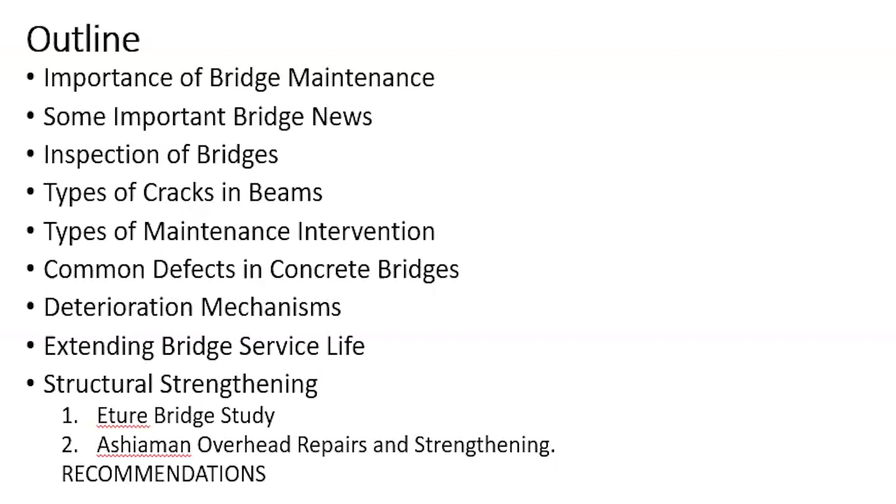On extending the bridge service life, we take structural strengthening as a case we worked on, the Ashaiman overhead repairs and strengthening. We attempted the same on the Eture bridge study, but in the course of the presentation, we shall see why Eture bridge could not receive the same approach as the Ashaiman overhead bridge had. At the end, we shall have recommendations for the Ghana Highway Authority on what steps to take.

Now on bridge maintenance: bridges are a critical component of the road and transport sector. Without a bridge, no matter how beautiful roads are constructed, if there is an obstruction and no link, there is no way the road will function. It's the bridge that links the two roads when there is any obstruction. So it is essential to have regular bridge maintenance for more economic and safe use of road infrastructure. If bridges are not well maintained, cases like the examples we will give will happen, and the economic life of a community or society will be affected.

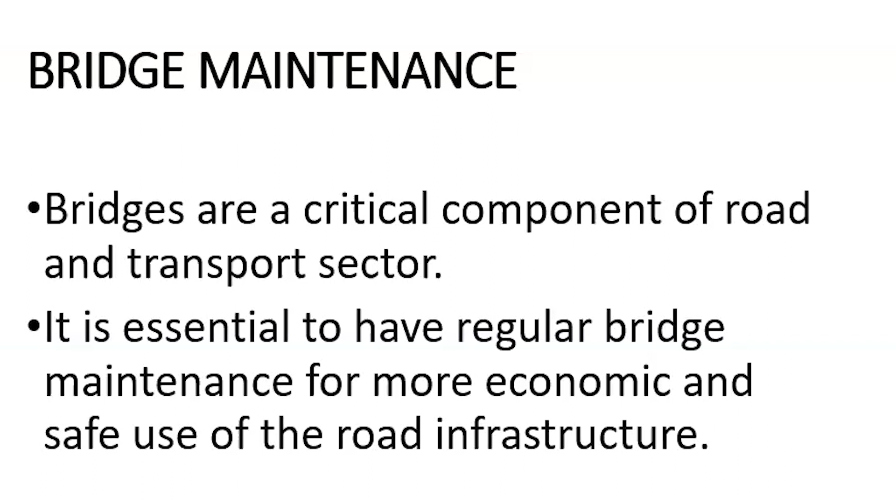We want to mention a few issues that have happened to bridges across the world, outside the country. Recently in the news, the Baltimore bridge collapse happened in the United States of America on 26th of March 2024. It's a very long span, 2.6 kilometer bridge, a steel arch-shaped continuous truss bridge, where there was a collapse when a ship called the Dali struck one of its piers. A pier is one of the substructures of the bridge, which plays a very vital role. When such substructures are affected, no matter how huge or big, a single substructure can cause the collapse of an entire bridge.

That was what happened when the ship was supposed to pass under the bridge, missed the track, and hit one of the piers, causing the entire collapse. This has caused so much damage to the United States of America. The Baltimore port in particular has been blocked; shipping to and from the port became impossible. As a result, 8,000 jobs were lost from just this accident. The economic impact of this closure of the waterways costs $15 million per day for the state. That is how serious just one accident on a bridge has caused the country.

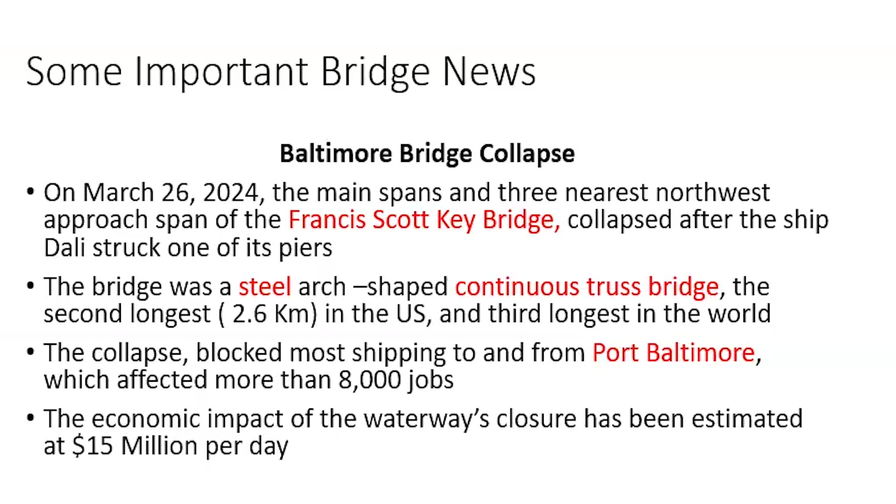Another example of a bridge collapse is the Morbi Bridge in Gujarat, India. This also happened about two years ago. The bridge, which had been constructed and was supposed to have been rehabilitated, had gone through some repairs. Four days after reopening, the bridge collapsed. Even though they had come to do the rehabilitation and repairs on the bridge, just four days later it collapsed. The consequence of this accident was that 140 people died and dozens of others were injured as a result of the collapse. Just one bridge collapse, and instantly 140 people died.

There has been an investigation into this. The report from the investigation team talks on two things: administrative lapses and technical incompetence, meaning due process was not taken to get the right candidate for the job. They were given the job despite being technically incompetent, and this caused very big flaws in the whole work. Such things happen because importance has not been given, or some interests have come in, where people have lost lives, and the government also has so much to pay for this particular thing.

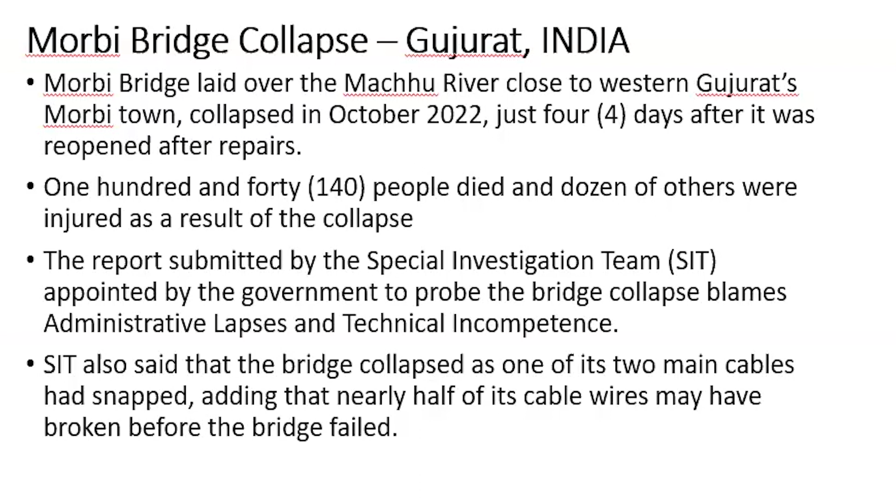When a cable is lost, it means we have lost some of the supports. So 1 of the 2 main cables snapped, and half of each cable's wires might have broken before the bridge even failed. This was some of the technical findings after the accident. It's observed that of 49 wires of the cable, 22 were corroded, indicating those wires may have already broken before the accident. The remaining 27 wires broke recently.

This tells us that there has not been proper inventory taken, proper work done during project preparation. Some things should have been seen, that these things had to be replaced completely, and that was not properly done because of technical incompetence.

Additionally, the vertical suspenders that supported the bridge were incorrectly repaired. We have the cables and the superstructure deck, and the link between them is the suspenders. These suspenders were supposed to be repaired, but they were not properly repaired. Old suspenders were seen to have been welded with new suspenders, so this will not work.

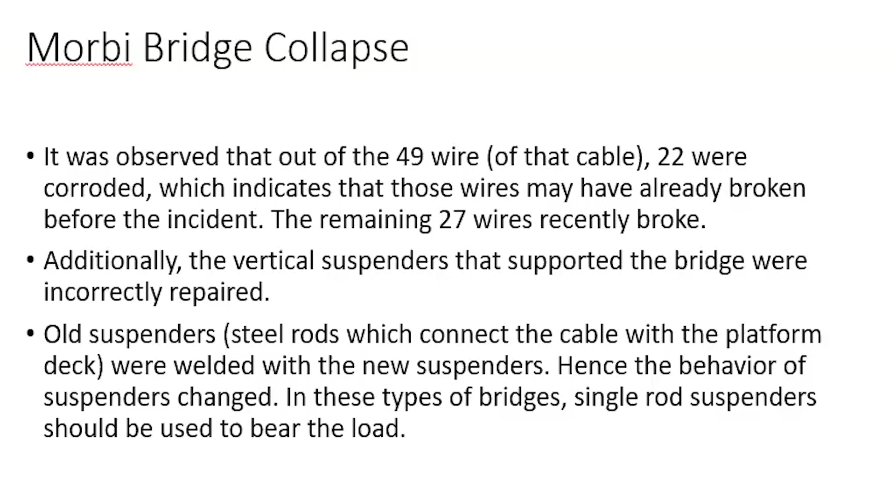The steel rods which connected the cable with the platform deck were 2 things. We're supposed to have 1 single suspender per cable and deck, but 2 suspenders were welded, which has been a very serious technical flaw in the entire works.

These are the consequences of not taking bridge maintenance very seriously or paying much attention to it. Now, inspection of bridges is the first stage of the work of bridge engineers. We first have to go and inspect bridges, and when doing so, there are things we consider.

You come there first, you check the top of the bridge. You look at everything that has to do with the approach of the bridge, the furniture — all these things will be looked at. Every single thing will be considered.

One important thing in this inspection is that when you look at the top, we have to look at an important aspect of the bridge furniture, which is the drainage. The bridge drainage is very vital. When there is blockage in the drainage, whatever comes from the bridge deck has to be immediately drained out. If there is blockage, this will give us a problem.

So we check the top, every aspect will be checked before we go underside of the bridge. We look at the beams and the slab, the piers, the abutments, and the bearings. These are all important things that, in this first routine visual inspection, we check. The critical aspect of this inspection for the concrete elements of the bridge is to observe cracks.

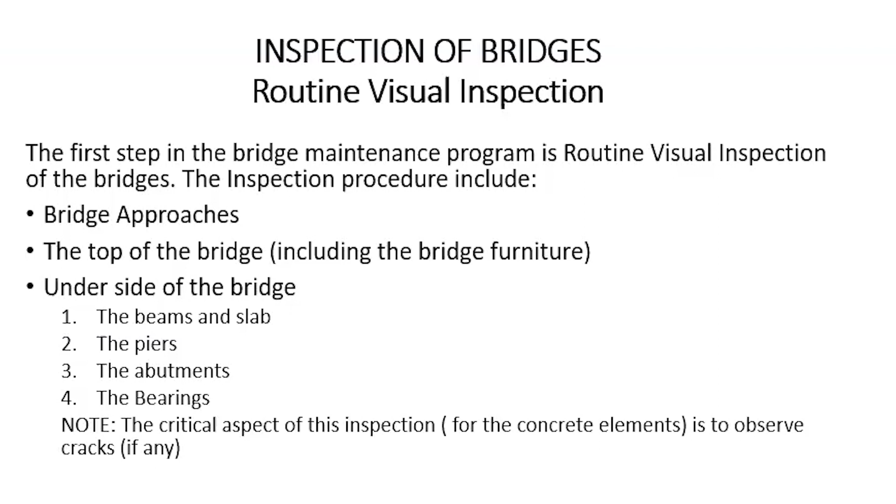Cracks are very important things we consider when inspecting our bridges. So when we go for this inspection, after we get the first information from the visual inspection, it will be marked and recorded. Based on the extent of the deterioration, the engineer may recommend additional testing — maybe the information gathered isn't enough to know the actual remedial action to take.

There may be a further test, which we call a detailed condition survey. It's not every inspection that calls for a detailed condition survey. Some observations are obvious and don't need further study, but some need further investigation. This can also add cost to the particular bridge, because the detailed condition survey is more of a destructive one.

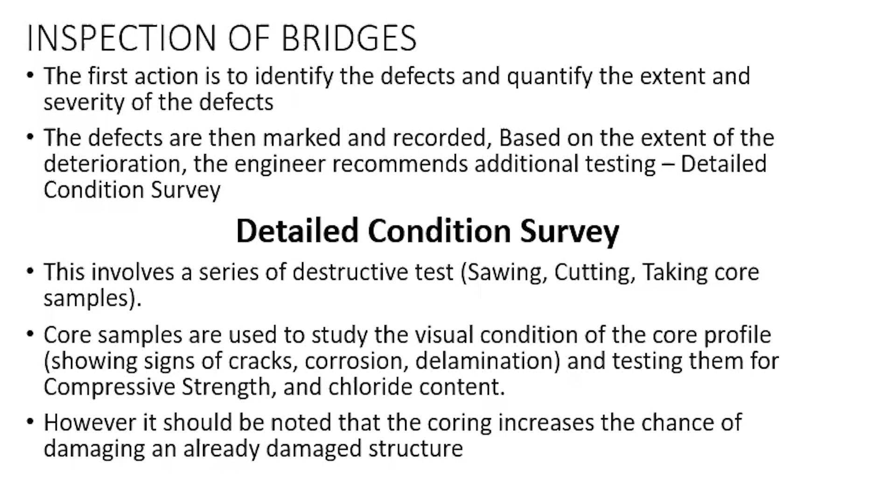It's a destructive test where parts of the bridge have to be taken off, either by sawing, cutting, or taking a core sample. So when the bridge is already in a poor state, such a survey can actually cause a collapse of the bridge. It's not always attractive to go into that, but when there's a need for it, it has to be taken care of.

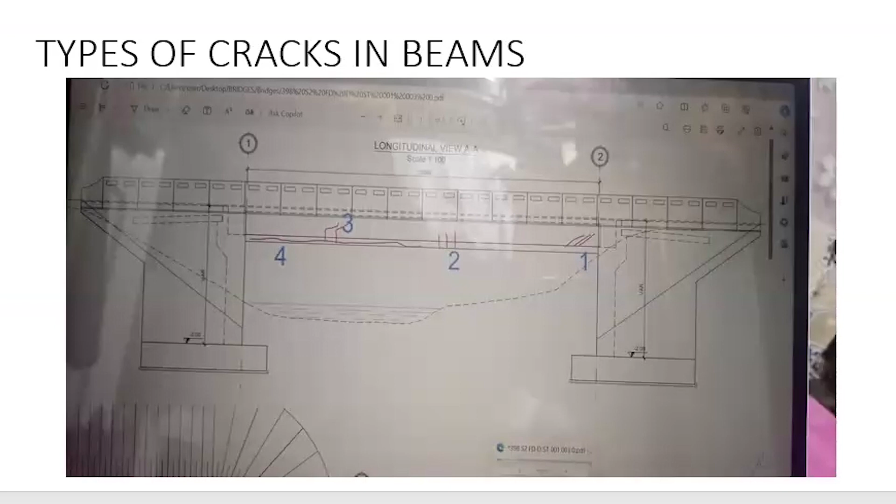The next topic is types of maintenance intervention. We have done the inspection and seen the situation on the ground. Now we have to plan what maintenance intervention to take. Bridges, depending on their status, require maintenance interventions such as routine, preventive, repairs, strengthening, and replacement.

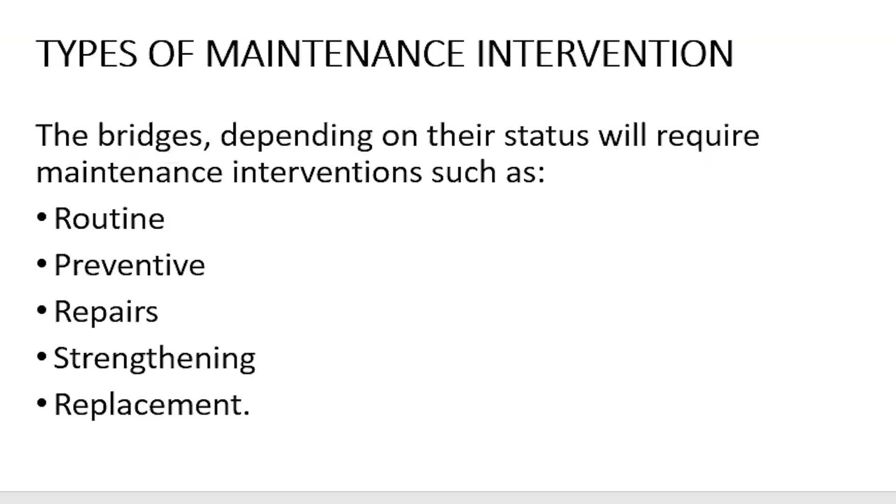Routine maintenance is very important - bridge engineers routinely visit the site, take inventory, and quickly remedy whatever is going wrong with the bridge, because this is less expensive and more convenient. But when neglected, it leads to very expensive interventions such as strengthening or replacement. Small things done regularly will keep the bridge serving for a longer time.

Like clearing vegetation in the channel and around the bridge is one of the activities done in routine maintenance, cleaning the entire bridge of debris, vegetation, and accumulated soil materials. Because when you clean the top of the bridge and there is rain, water will not be collected, and water is the biggest enemy of the bridge.

People will be surprised to hear that, but bridges are constructed in water. Why should water be the enemy? No, water is the number one enemy of the bridge. So whatever causes accumulation of water on the deck, around the beams, or in pockets of water is going to cause a very big problem for the bridge.

Also clearing the bridge drainage system, as I said earlier, avoids stagnation of water on the bridge deck. This is very important - replacing broken drain pipes and ensuring they extend 1.5 meters under the deck. When you take the cross section of a carriageway or bridge, at the two sides where we have a curb, we're supposed to have drain openings and drain pipes.

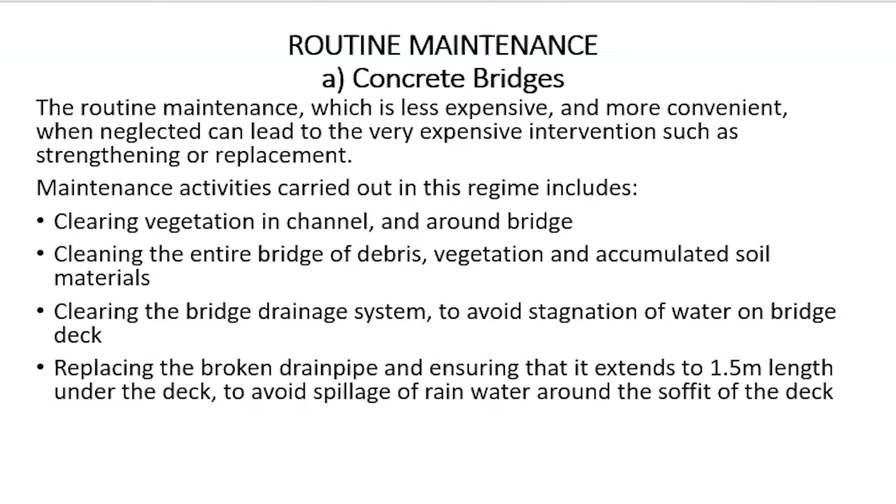And that drain, there should be a pipe that goes beyond the surface of the beam to about 1.5, so that water will not be spilling around, water will not be spreading around the beams when it is flowing the distance. So we have consequence of failure to carry out routine activities.

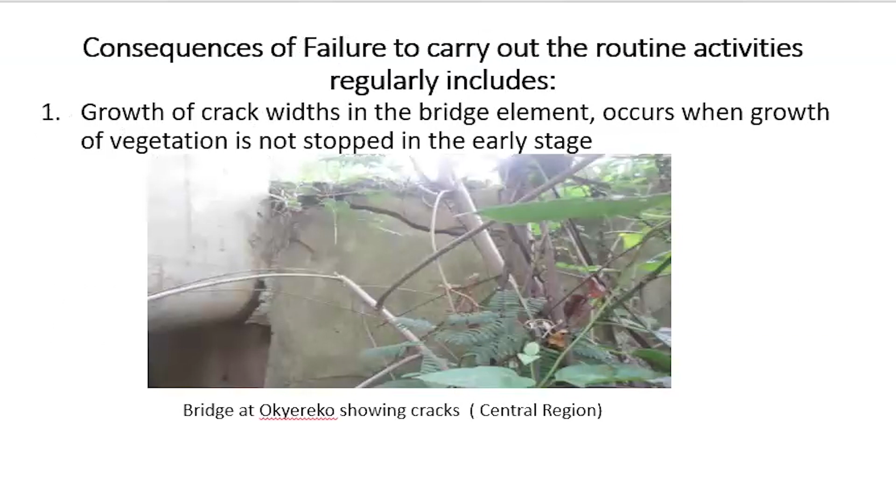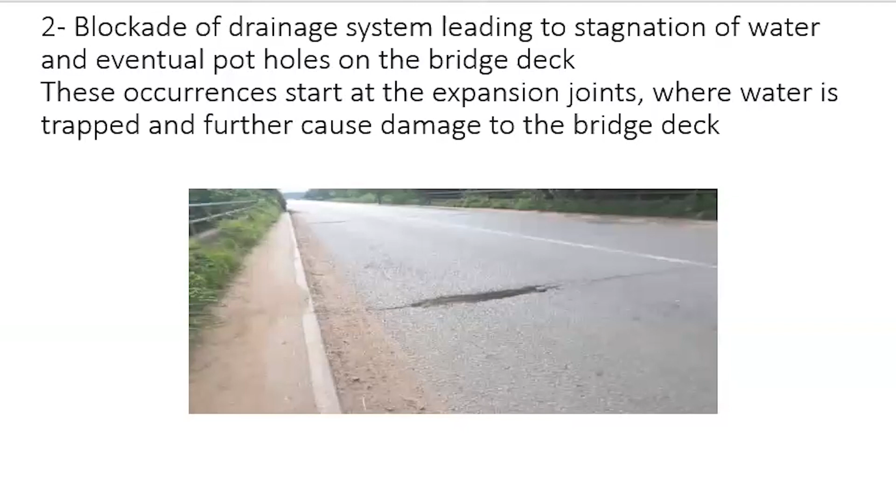You can see from the picture, this is one of the bridges we have in the country. As I approach, wing walls have cracks. We have a road like this. You can see the curb, the road, the walkway, and where the pipe or the opening for drainage is supposed to be, you can see that it's filled with soil, meaning the drainage doesn't function over there. So whatever comes there will be collected, and that will lead to damage to the bridge. When it's not repaired, this is what it leads to.

Now we come to bridge repair and maintenance. Because of the time limits, I think some of them we have to skip to go on to the main thing, but these ones are to guide us to understand what the main presentation is going to be. These are important for us to know when we are dealing with bridge repair and maintenance: lasting protection and durable repair of concrete components, high performance injection systems, structural rehabilitation systems, sealing of deck slabs, joint sealing, waterproofing of concrete. These things, maybe when it comes to costs and assets, we shall go into them. They are very important in our bridge maintenance and repair works.

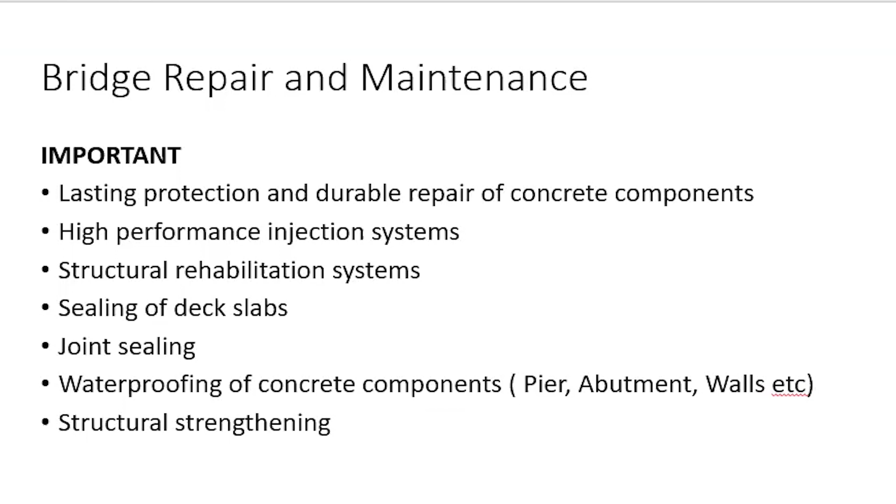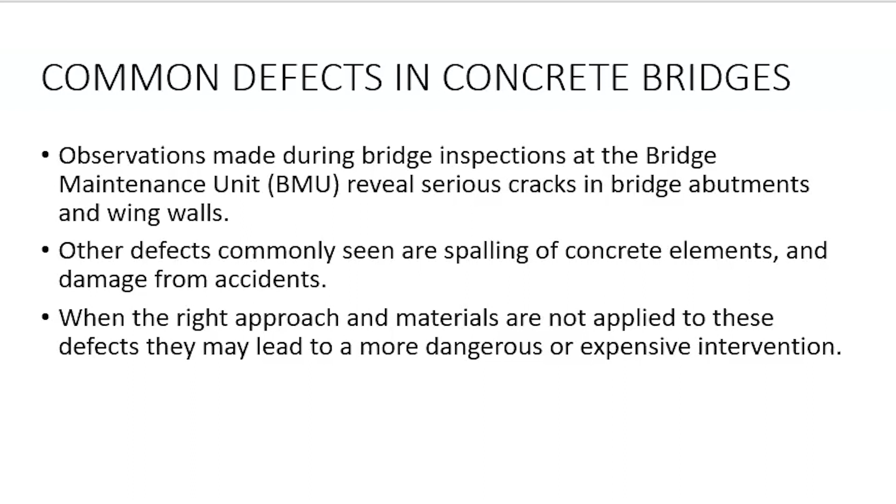Some of the common defects we see in concrete bridges, in BMU, we see that there are a lot of serious cracks in bridge abutments and wing walls. We see spalling of concrete elements, and also damage from accidents. When the right approach and materials are not applied to these defects, they may lead to a more dangerous or expensive intervention. Instead of just doing something small, when it's not done right, at the end of the day, we're going to replace entirely or do bridge strengthening, which is more expensive.

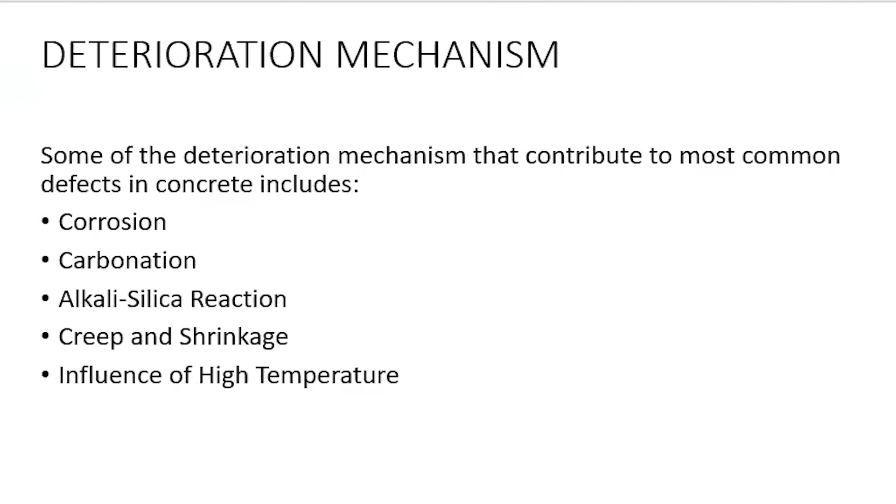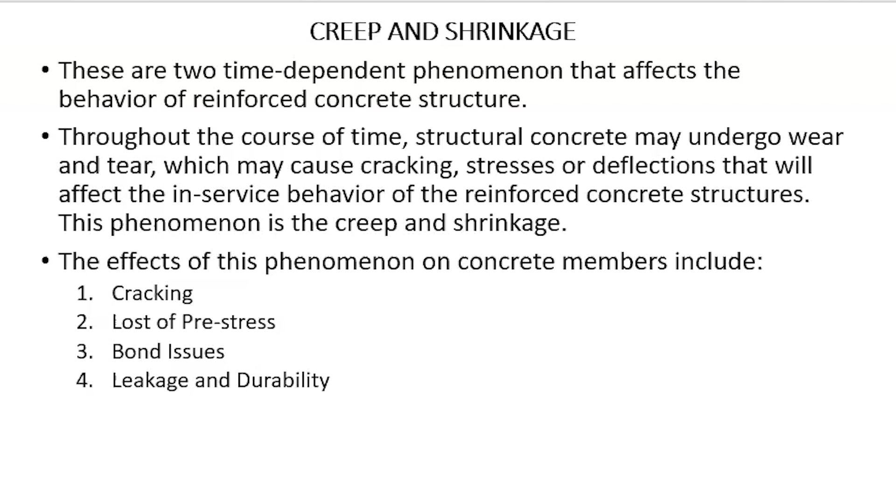Deterioration mechanisms are the processes that the bridge goes through, and they give us those defects. Corrosion is one of them, carbonation, alkali-silica reaction, creep and shrinkage, influence of temperature. These are 5 important mechanisms. So the effect of creep and shrinkage is what I'll mention here. It brings cracking, loss of pre-stress, bond issues, leakage, and durability problems. When there's creep and shrinkage in concrete, these are the effects. Maybe at a further opportunity, we'll talk about that.

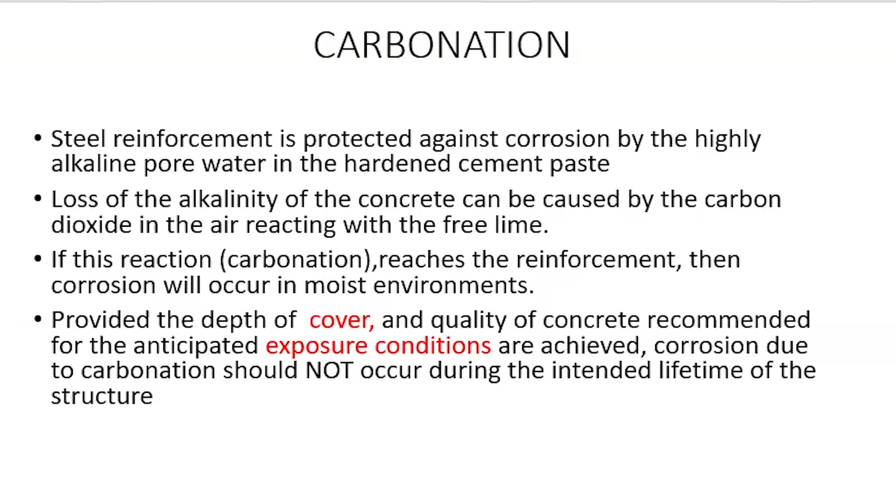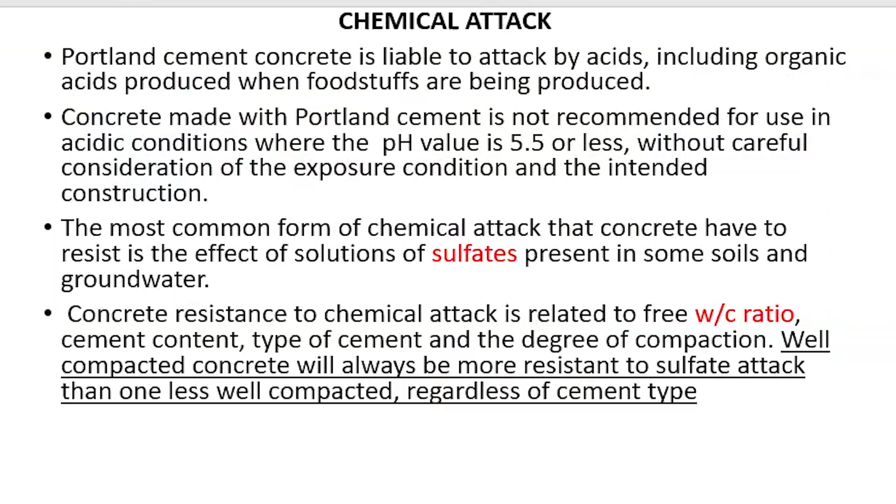Carbonation is a process that happens in the concrete when the concrete cover is not properly achieved, and when exposure conditions were not considered during construction. For every element in the bridge or structural component, there is exposure that should be anticipated, and that exposure tells the thickness of concrete cover we should have over the reinforcement. If those things are not followed, then we have such problems. This is one of the problems in carbonation. And chemical attacks like chloride attack, this is what it gives us.

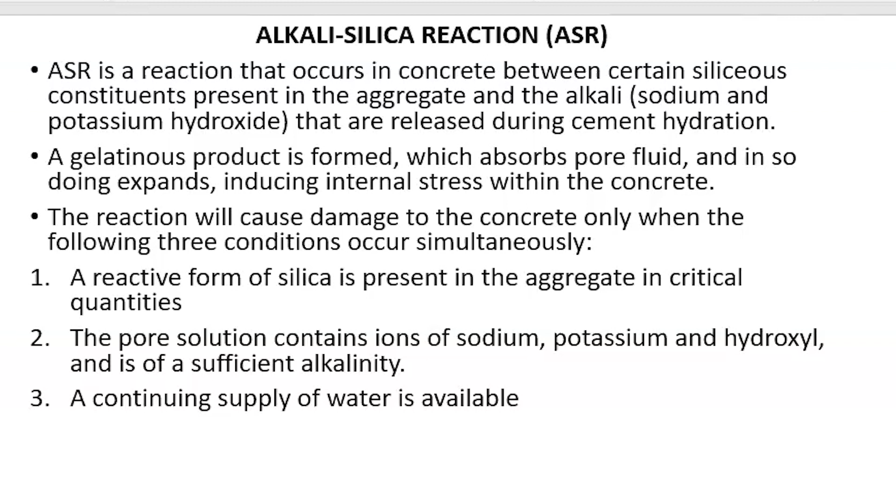Then alkali-silica reaction is also a very major aspect of bridges that will need an extensive discussion. It sometimes causes an expansive failure. Some are gradual, but after it is observed, there's nothing else that can be done, apart from, if it is observed earlier, making the structure completely watertight, which can halt its effect. So these are some of the effects that you can see with alkali reaction.

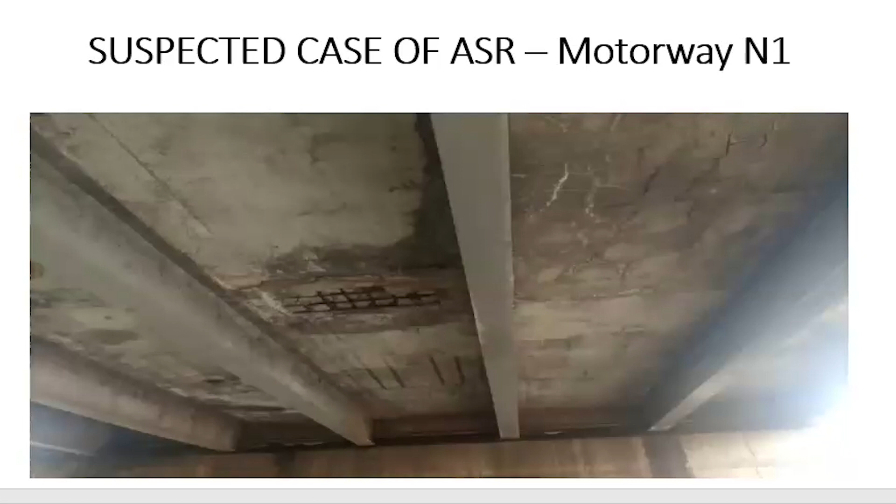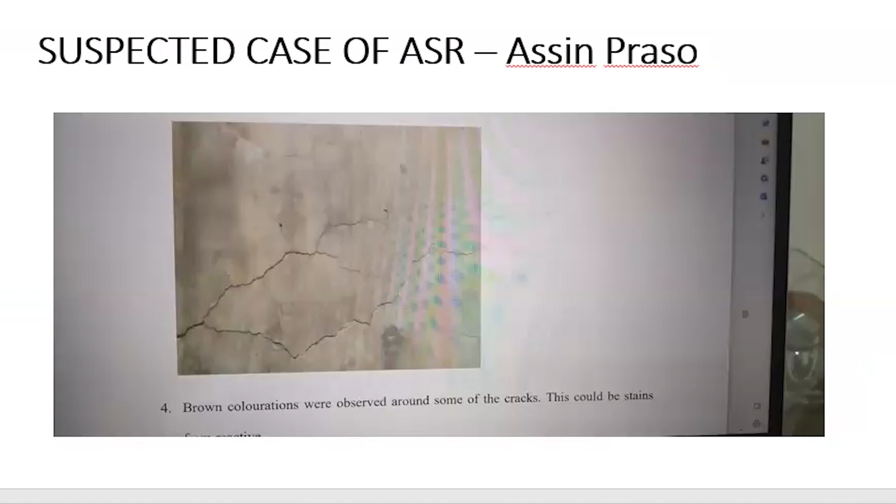This is typical of what we suspected on the motorway N1. This bridge showed very serious defects, and it was demolished and reconstructed. In highways, we call it Mahama Bridge. This was how it used to be when we saw these defects, but this is now a new bridge altogether. And Assin Praso is a case still under study because there's a suspected case of alkali-silica reaction on the substructure of the bridge. This is one of the pictures showing Assin Praso.

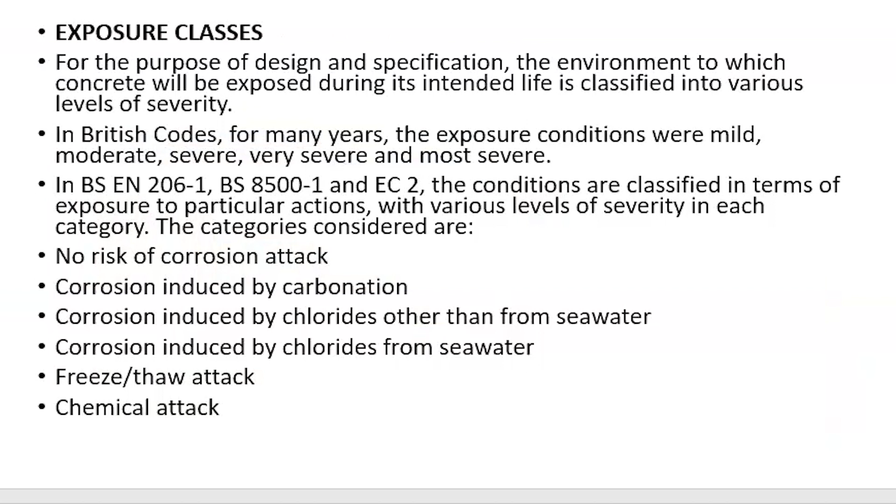Now, the exposure classes is what I talked about, and this is just the literature on that. Then, extending bridge life is very important. Extending the bridge life.

The observation on the concrete bridges within our road network is that many have lost their load-bearing strength due to deformation, corrosion, or damage to the original reinforcement steel. Others have been exposed to a load regime higher than what they have been designed for, as I said earlier.

So some of the problems our bridges are having are because the load regime has changed. They are now receiving higher loads than they have been designed for. Others are due to vehicular impact on bridge members, and those have reduced the

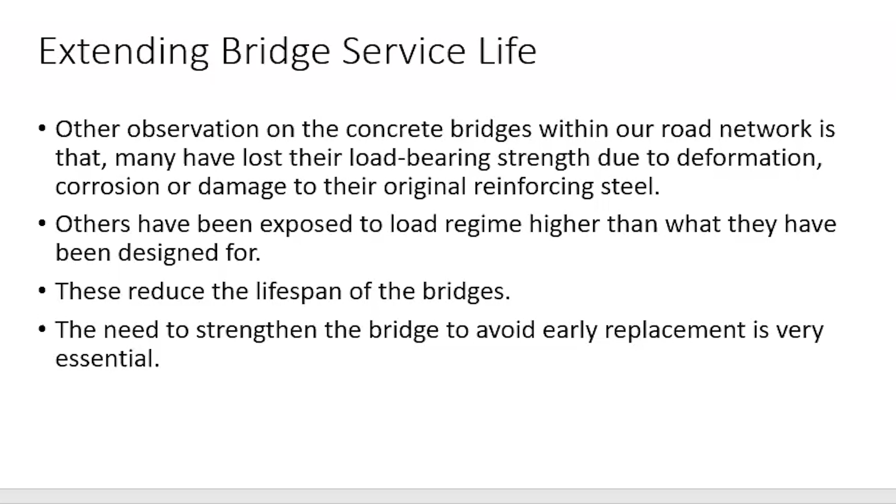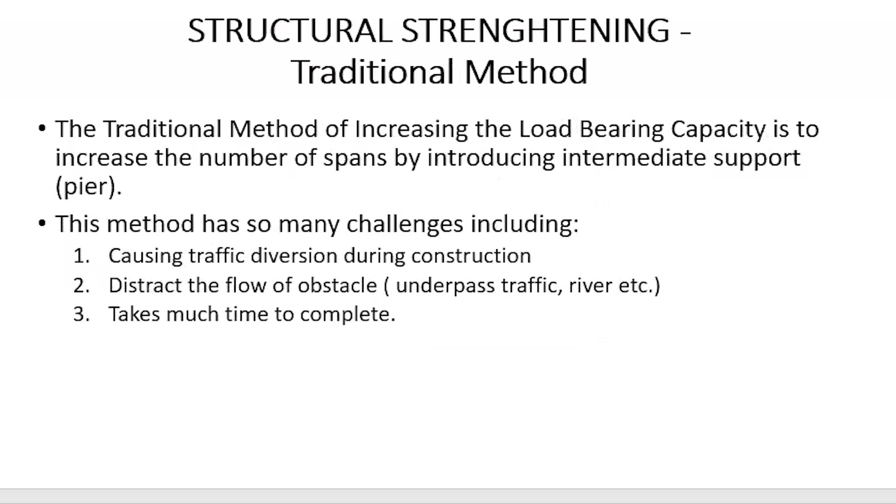load-bearing capacity. So on structural strengthening, we have the traditional method, which we used on the Iture Bridge when we saw the condition of the bridge. Iture Bridge, in the Central Region, is a typical bridge that requires strengthening and protection against aggressive environment. It is along the national route N1, within the haulage route.

This is a very important word. Haulage routes are the routes that always receive the heaviest loads, where abnormal loads are often applied. And this bridge is within that corridor. To increase its load carrying capacity, steel fabricated props have been provided to all the 3 spans. We gave them more fabricated props to reduce their spans.

And in July 2022, upon inspection of the bridge, the following very important observations were made. One span has the entire prop washed away, meaning one span is free. The support that was put in to strengthen it is no longer there. And the remaining 2 spans either have loose props or no contact with the props.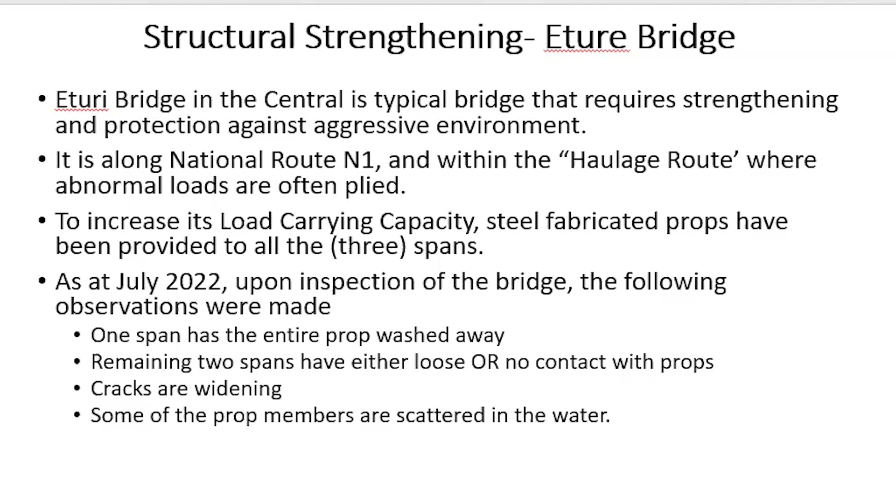The props are there, but the bearing we put between the prop and the underside of the slab has lost contact because of settlement of the props. The material under the props is being washed out by the tide that comes from the sea up and down. It washes and settles, so now there's a loose contact. And cracks are widened. Some of the prop members are scattered in the water.

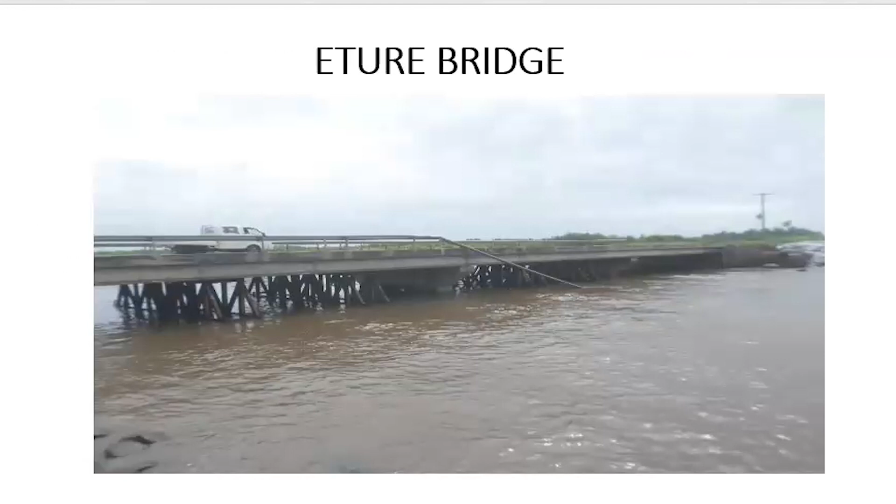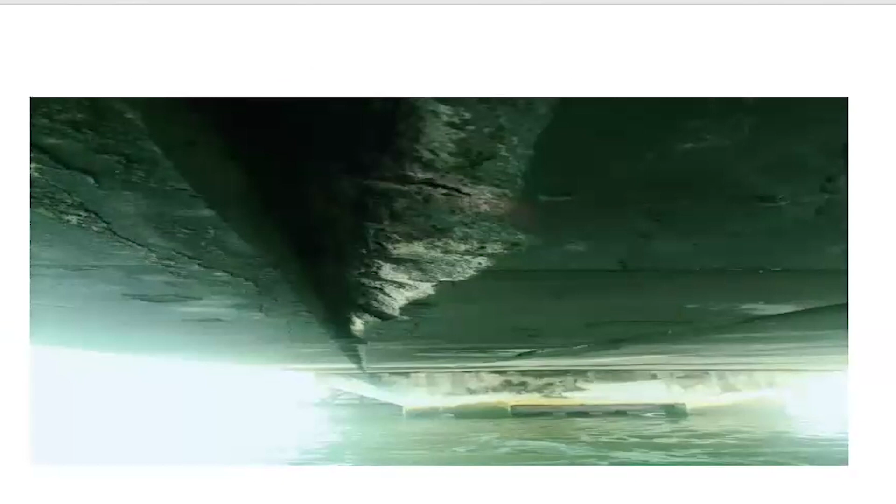As you can see on this Eture bridge, at the last end the props are not there at all. But the middle span and the first span still have some props. Here some of the spans show the underside of the bridge, which is serious. We can see a very possible chloride attack from the sea eating into the bridge, and cracks are widening. This is a bridge we always ply on the N1 at Eture, Central Region, near Elmina.

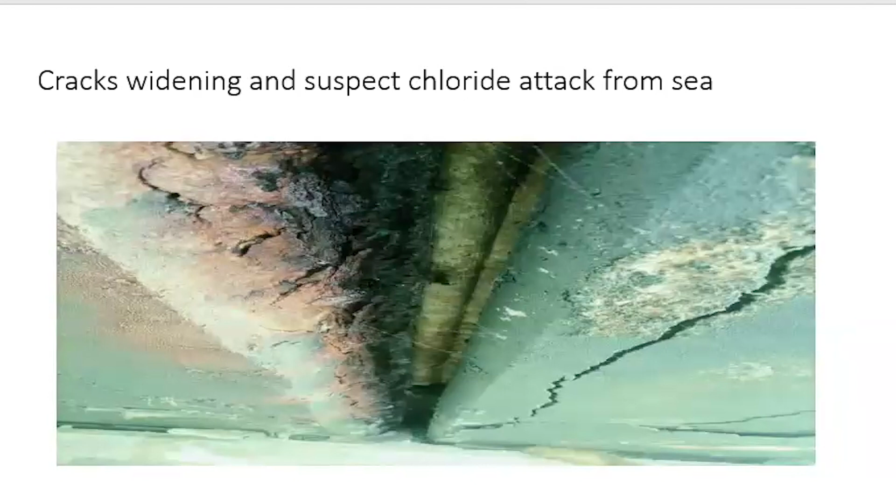This was the condition in 2022. Only God knows what the condition will be today. So at Eture, these are some of the washouts. Yes.

So now we have the case of what we're able to use. The alternative, more advanced way of structural strengthening is using carbon fiber reinforced polymer, that is CFRP. This is a composite material used in repairing as well as strengthening reinforced concrete structures. If you look at what we did on the Eture bridge, we were supposed to bring what?

Fabricated props, put them within the span, 2 more props in every span, meaning every single span we made a triple span. If it's 30 meters, we reduce it to 10, 10, 10. That was what we did on Eture to hold the bridge. But the more engineered and more advanced one is to use carbon fiber reinforced polymer.

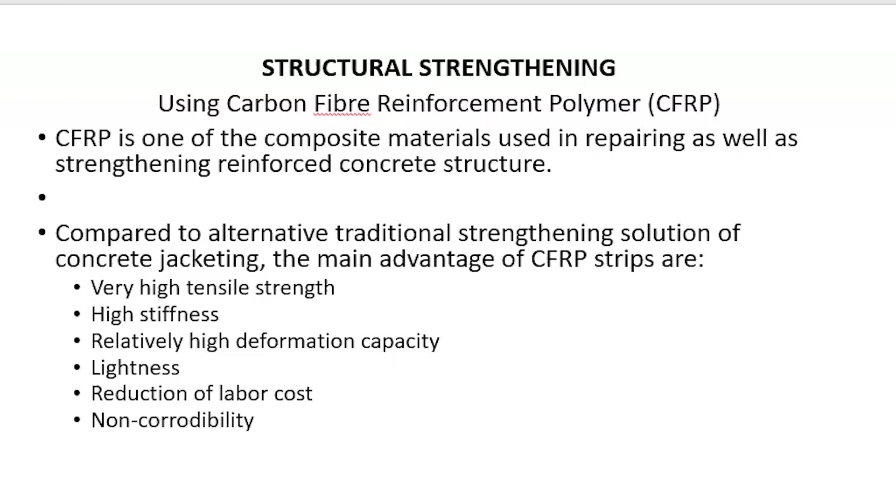Compared to the alternative traditional strengthening solution of concrete jacketing that we did, the main advantages of CFRP strips are very high tensile strength, high stiffness, relatively high deformation capacity, their lightness, and the reduction of labor costs. They are non-corrodible. These are some advantages that we have with this system.

So we had a typical strengthening carried out by BMU 3 years ago, in 2020. We worked on the Ashaiman overhead, a typical structural strengthening carried out by BMU using carbon fiber reinforced polymer, after it had a very severe vehicular impact. The entire work was completed within 24 days. Even in these 24 days, only 15 days were on site where we affected the traffic,

only 15 days that we affected the traffic on the motorway, because we have few alternatives to link Accra and Tema, so complete closure of the motorway was no option for us. And we didn't have any opportunity of diversion around the bridge. So the only thing we could do was manage the traffic.

So of 24 days, 15 days were used on site and 9 days off site. And these 9 days were what we used for public education and off-site fabrication, and all these things were done.

So 24 days doesn't mean 24 days holding on the traffic or distracting traffic. And the activities we carried on in this particular project: propping the damaged beam, breaking and removal of concrete from the damaged section, drilling and installation of shear connectors, applying corrosion protection, erection and fixing of formworks, casting of concrete, sandblasting the soffit of the repaired beam, applying adhesive and installation of carbon fiber, and applying the finish coat.

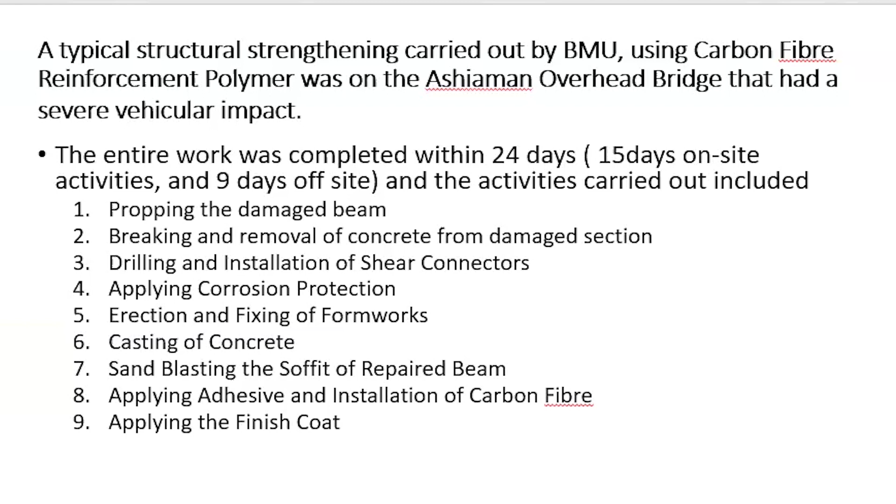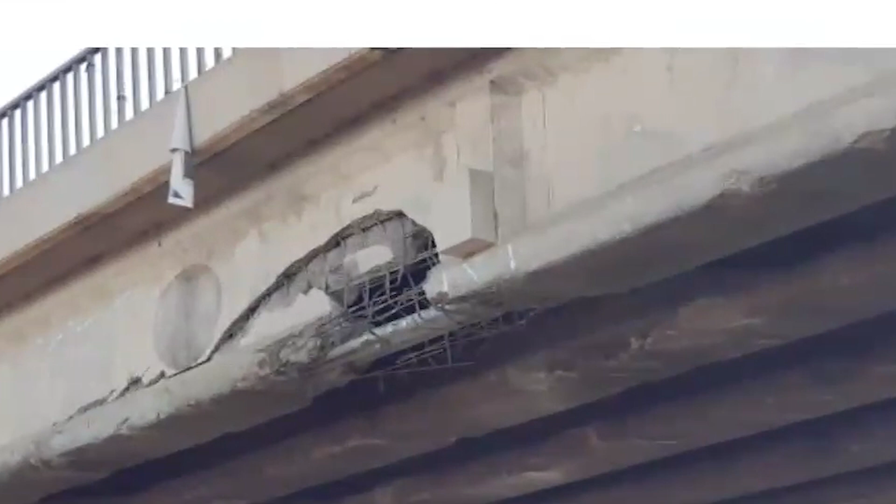So this was Ashaiman, when there was such a serious impact on the bridge. This was the impact. We can see a very huge beam of an I section. The web has been affected. The bottom flange has been seriously affected, and also close to the mid-span, we can see the post-tension tendon has been exposed. All the reinforcement has been affected. This is a very critical aspect of the bridge that has been exposed.

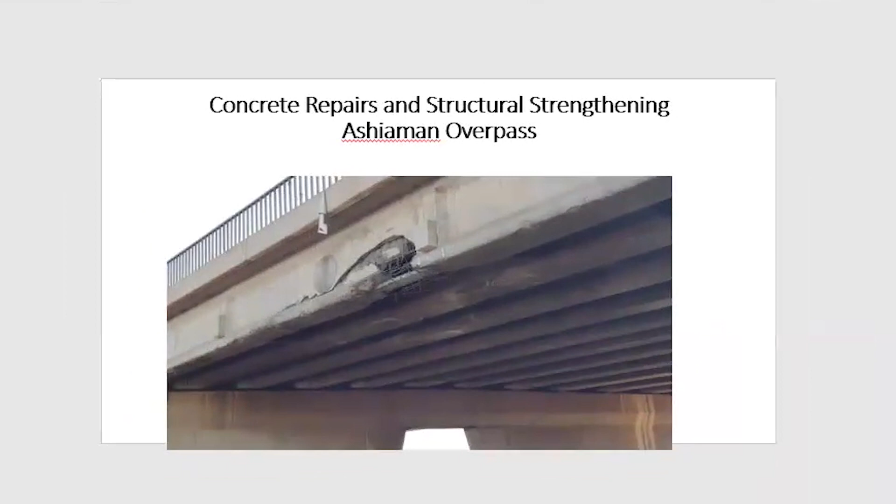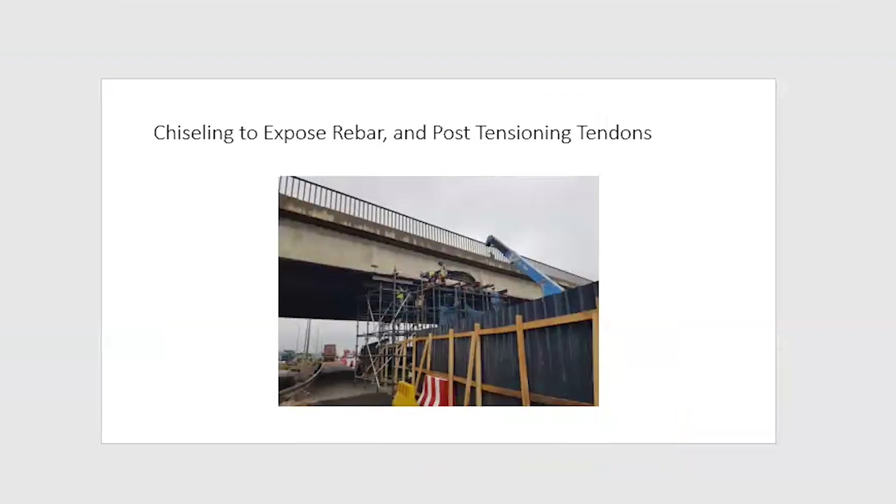Leaving them for a long time will lead to corrosion, because Ashaiman is not far from the sea, and also the vehicular traffic is still being plied on. So it was something that needed a quick intervention, and the solution was gotten through the use of this. So we have in the process chiseling to expose the rebar. You could see that part of the damage still left in the web has been clearly removed through chiseling. And to avoid further impact on the bridge, it is drilling and cutting, just to avoid vibration around it. So this process is what we took in getting to the solution.

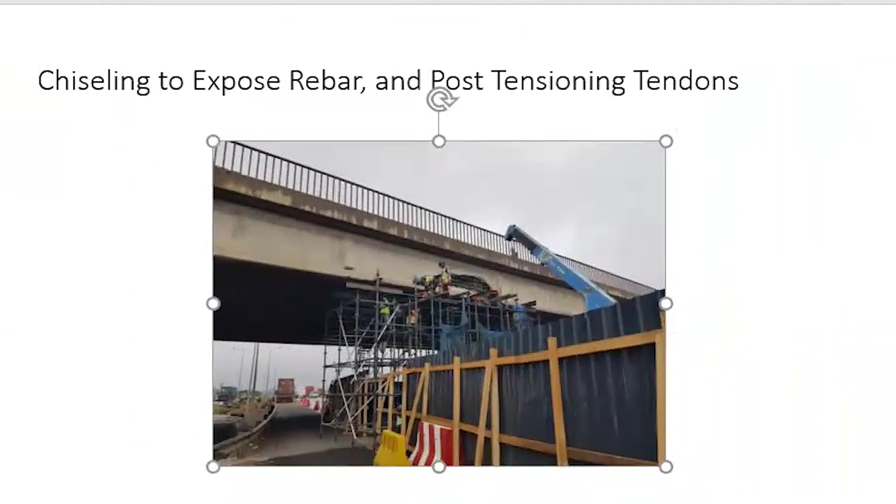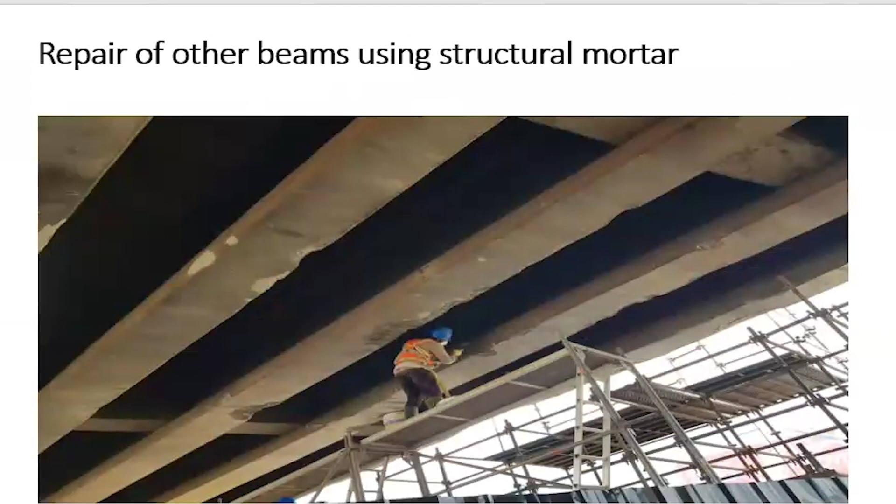This is still in the process where we cleared, and now we're fixing the prop to support the beam formwork, because the formwork of the beam has to be well supported. This is for chiseling and exposing the bars, and also the tendon. Then the next is some of the beams which received minor injuries. For them, we apply structural mortar after applying bonding elements, because they all need to be protected. All the areas that have some injury due to the impact, we use structural mortar on them.

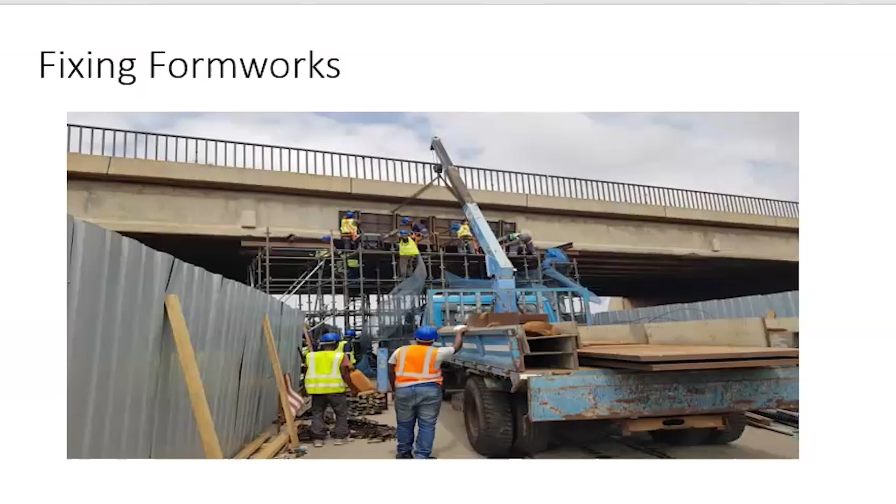And this is fixing of the formworks, very heavy, because we have to fabricate the formwork to take the shape of the beam, having the web and the flange. And one important thing is about the casting of the concrete. The concrete is supposed to be cast from the side, and it has to be self-compacting. It has to have high pumpability. So even the recipe for the concrete, we considered all these things: fast curing, high pumpability, and self-compacting. So this is the formwork fixed.

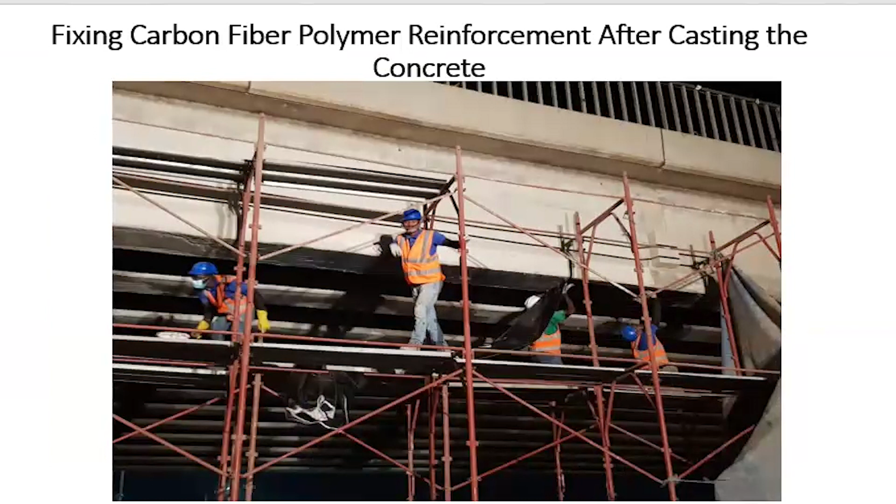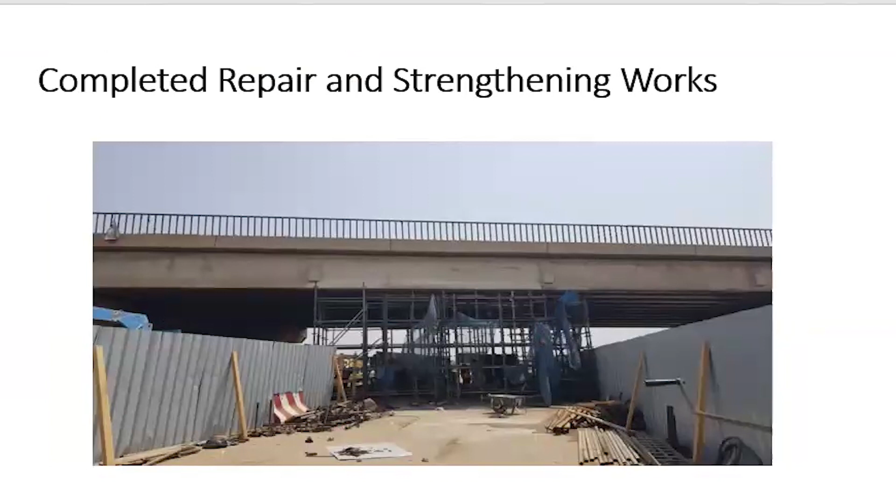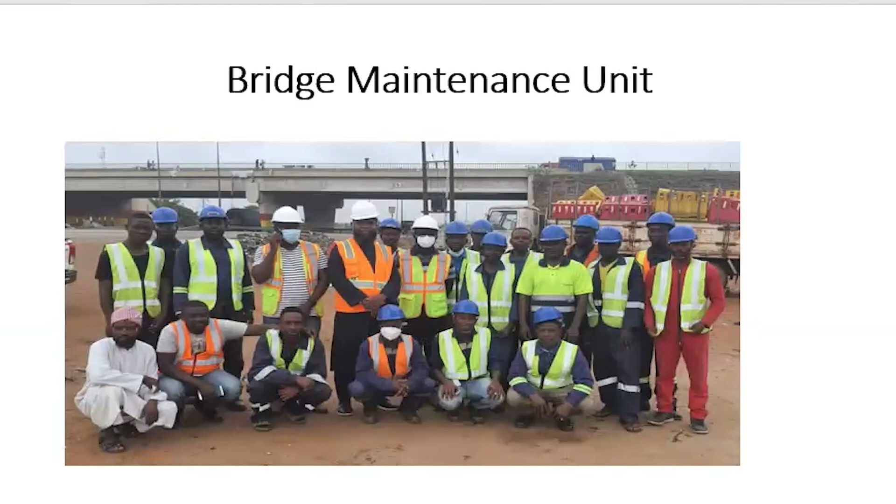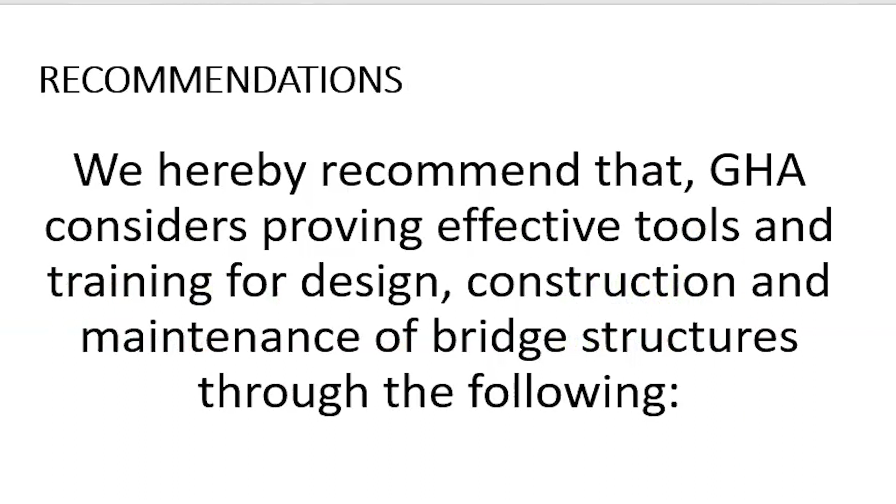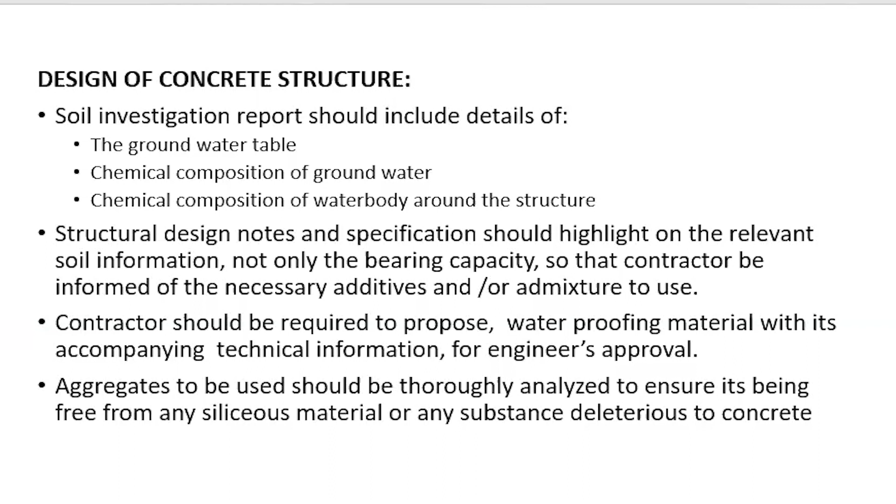The recommendation we have for GHA on this presentation is that there are three aspects that should be considered. One, about design of concrete structures. It's important that soil investigation should bring everything about the groundwater table, chemical composition of the groundwater, and chemical composition of water bodies around the structure, so that the contractor will be responsible for using the right additives, the right admixture for his work, and the waterproofing that should be used. If in design and construction we use the right thing, we shall have less to worry about when it comes to maintenance.

On maintenance of concrete structures, bridge maintenance units should be given training to attain certified applicator status, especially for injection, grouting, and carbon fiber polymer mixing. All necessary equipment and tools should be procured for BMU to carry out these activities whenever the need arises. And on using carbon fiber, we request that bridges along the haulage routes where abnormal loadings are applied should be strengthened with carbon fiber, and Iture bridge should be given a load restriction whilst BMU mobilizes to reinstate the washed-out props, whilst awaiting the replacement of the entire bridge.